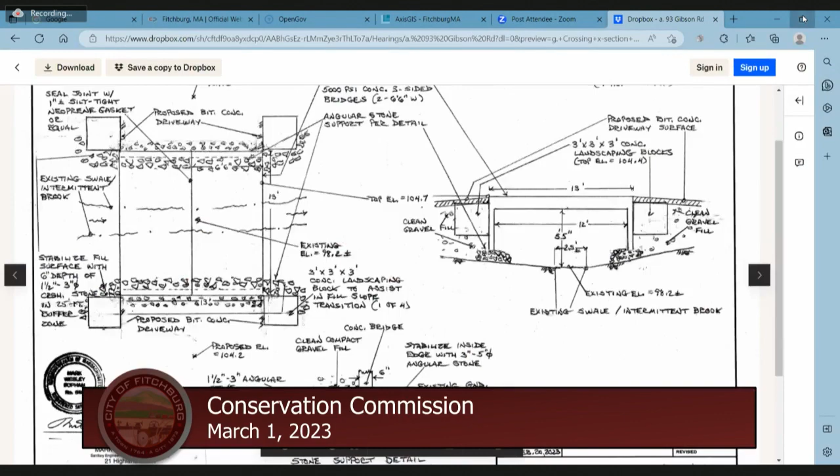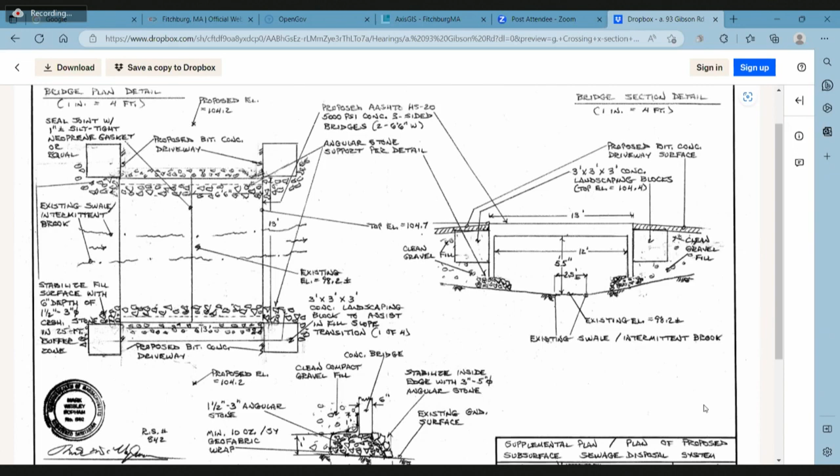Just to quickly recap, this is essentially a 1 inch equals 4 foot presentation of the actual bridge crossing. On the left-hand side is a plan view detail, and on the upper right part of the sheet is a view looking through the bridge crossing with the channel flow in the center. Underneath there's a detail of how you set these things.

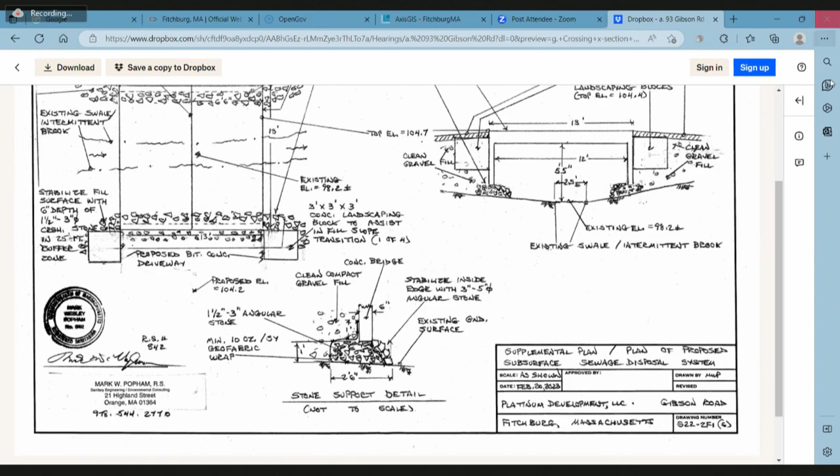You literally don't just place them on the ground surface that exists there, because it's currently a loamy forested soil, so you create a stone support for the bridge itself. An additional feature is on all four corners, back from the edge of the actual bridge, I show basically a 3x3x3 slump block or landscaping block.

It helps with the transition of the fill along those corners, and then you armor the outside of that with the 3 to 5 inch stones. So any runoff that comes off the driveway on the corners of the bridge will essentially be slowed down and filtered through that stone.

Is that all for us, Mr. Popham? Unless you have some questions directly for me.

Okay, let's open the floor for public comment. Would anyone like to speak in favor of or against this hearing, or would like to request more information? Please state your name and address for the record.

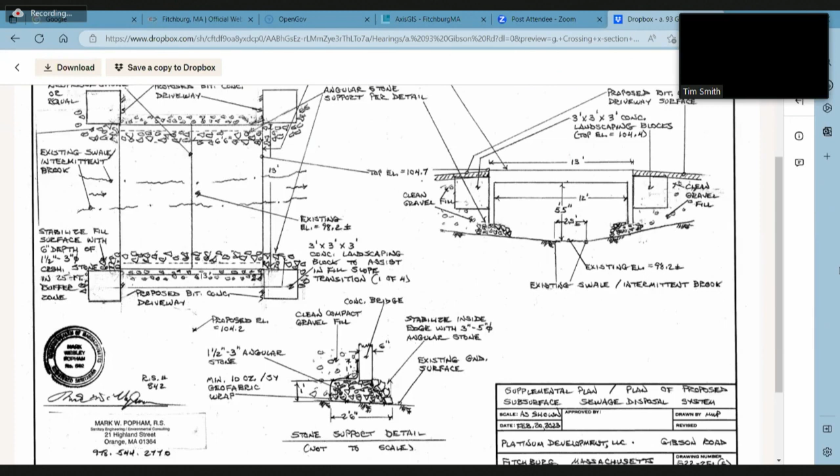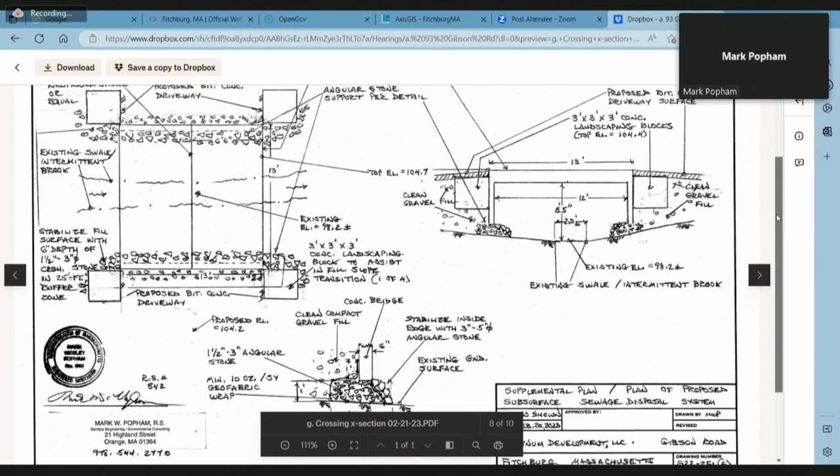How about elevation? Do you have to elevate the land in order to bridge the stream? That's the reason for the proposed grading shown on the site plan, the full site plan view. You do have to, because this has the required height of 5 feet plus over the actual stream section, in order to meet the openness requirements and so forth of the stream crossing standards.

That causes the two ends of it to have some fill brought in, and that's why I referenced in the cross section, bridge section detail, it shows how that's achieved. So there's concrete landscaping blocks used to act as a transition to the natural soil around the ends of the bridge without impacting the brook itself. And then you armor the outside of that with 3 to 5 inch stone, so it doesn't allow for any scour of the fill slope around the ends.

Yeah, so I see it's 5 feet 6 inches over the ground surface, and then the bridge itself, I assume, is 6 inches to a foot thick. So yes, the sides are 6 inches thick because of the loading on the bridge itself. It's a 12-inch concrete thickness on the top.

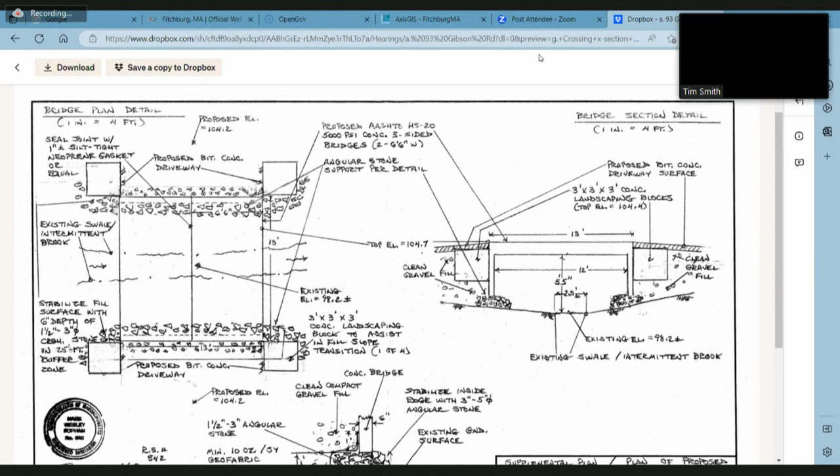You're going to have some type of grade, whether it be 1 to 1 or 1 to 2. Because there's going to be side slopes, right, to the driveway now, because the driveway is elevated, so there'll be side slopes. What's the grade of those side slopes, and how are you stabilizing those side slopes? Those side slopes are 3 to 1.

Okay, and how is it being stabilized? We are just looking for my note here - I've got the stone shown around on the plan view, the bridge plan detail. So there's stone that comes up around either side to the edge of the driveway. So you're rip-rapping the side slopes?

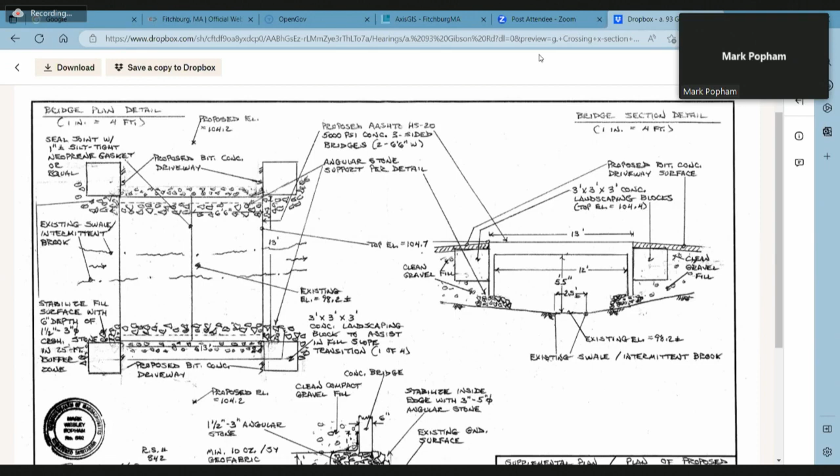Yes. And then as we're getting away from the bridge, we're clearing that area, and he's going to be grinding up some trees. Since it's still wooded along the property line on the other parcel, and we're not disturbing in the 25-foot buffer zone past the silt fence line shown on the plan, I would assume what would most likely make sense in that area, because there is a tree canopy still on either side of this driveway, is to use wood chip or wood mulch.

Right, but so you've got a 13-foot wide driveway, and then there's a side slope on either side at a 3-to-1 slope. So what's the total width of disturbance of the buffer zone? We are 13, and 7, 20 - about 24, 25 feet.

Okay, so obviously this is a significant change, except at the bridge itself where it's 13 feet. This is a significant change over the initial notice of intent you filed, where you had to list the amount of buffer zone disturbance.

Have you refiled the notice of intent, or how did you handle that? Yes, you should have that. I actually changed, can you put up the additional narrative? I modified the narrative accordingly and changed the actual two pages of the notice of intent form to reflect what's currently proposed. Okay, and that's what was submitted, that's what DEP has, and that's what DEP is responding to. Actually, they responded to the original plan, as far as I know.

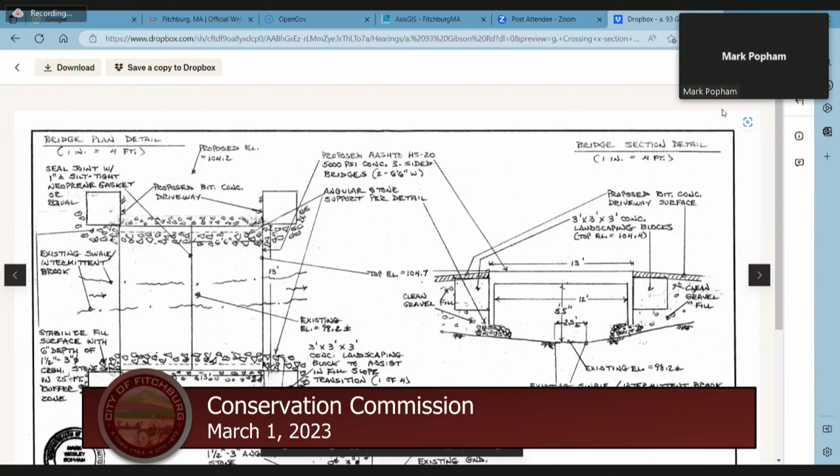Well, to be honest with you, the stream crossing standards and the openness calculations end up with an optimum height on these of 6 feet. So that's why we ended up, again using my past experience on the Holden situation 5-6 years ago, what ended up getting worked out with the Conservation Commission, Holden, and DEP was the closest you can get to that 6 feet, the optimum height for these crossings, independent of the flow of the stream itself.

Okay, and I'm at a disadvantage, I haven't seen the plan. How about the home, how close is it to the stream? The rest of the site layout is exactly as was presented in the last hearing, there have been no changes to any of that layout. That house, right now at its closest point, we're beyond the 25-foot buffer zone by about 30 feet, so 55 feet at its closest point.

Okay, I see it. Okay, thank you, that's all the questions I have right now. All right, thank you, Mr. Smith.

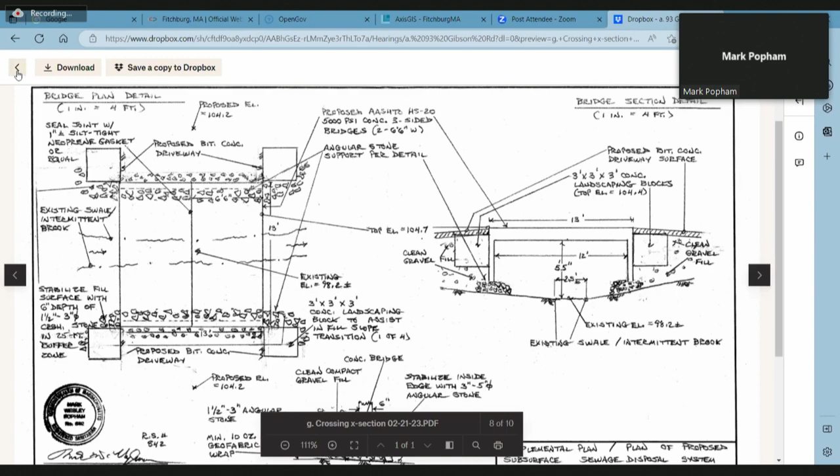There have been additional test pitting done on this site, as I mentioned in the original hearing, about where best to site the home and the leaching area on this site. So we have a pretty good indication of what the soil conditions are here. I didn't mean to indicate there are unstable or unsuitable soils where this bridge is going. In fact, there's probably normal forest litter, a topsoil layer of up to about 8 or 10 inches, and that obviously is not what you would want to set the structure on.

What's being used is more or less a stone spread footing, so to speak, to place that 6-foot-6 wide concrete bridge on top of, without doing major excavation or a concrete footing to construct this bridge. It's not really necessary for a residential driveway. My experience with the two in Holden is that worked very well there—those held in place very well. The additional feature of the slump blocks on all 4 corners also provides extra stability.

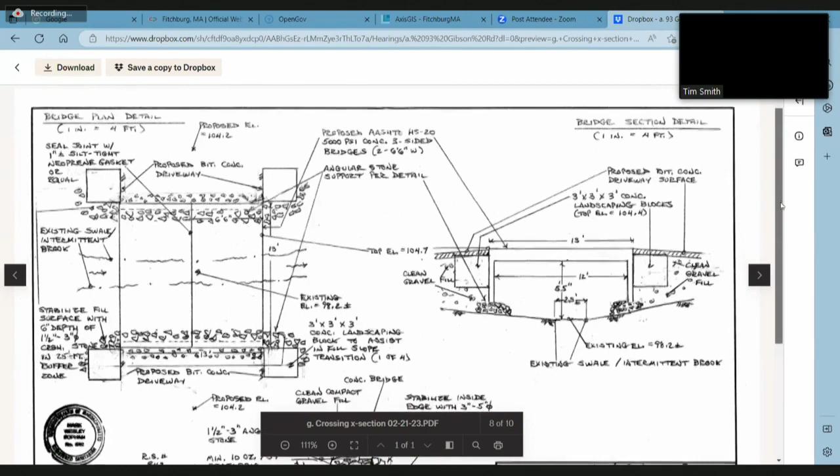So, Mark, no concrete footers? No concrete footers, nope. So do you have to go closer to the stream in order to put that stone down to form the footer? It's about a foot.

And you pretty much can see that on the detail plan.

Actually, another question occurred to me. So in order to construct this bridge, you have to get heavy equipment on the other side of the stream. How do you get heavy equipment on the other side if there's no bridge in place? How does that construction occur? Well, on the Holden situation, we did the approach from the roadway first, as much as possible, got as close as possible, then reached across with a pretty good size excavator—a link belt excavator with quite a long reach—and prepared that other side.

Hi, still going? Go ahead, Mr. Kaufman. Yeah, we can... Okay.

All right, so you're able to reach a lot of this, but you do the approach from the roadway first, and then you reach across with your machine and prepare that other side. Then the units come in, are placed, and you're able to complete the remainder of the work on the upland side.

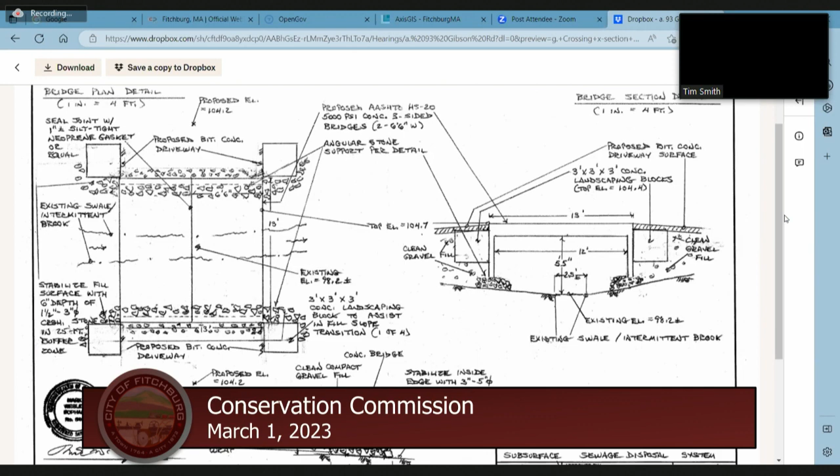So what's the size of that stone? That is 1.5 inch to 3 inches.

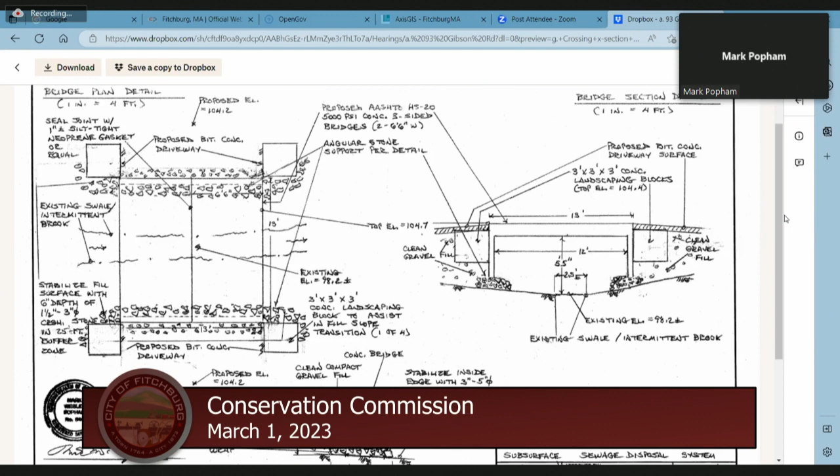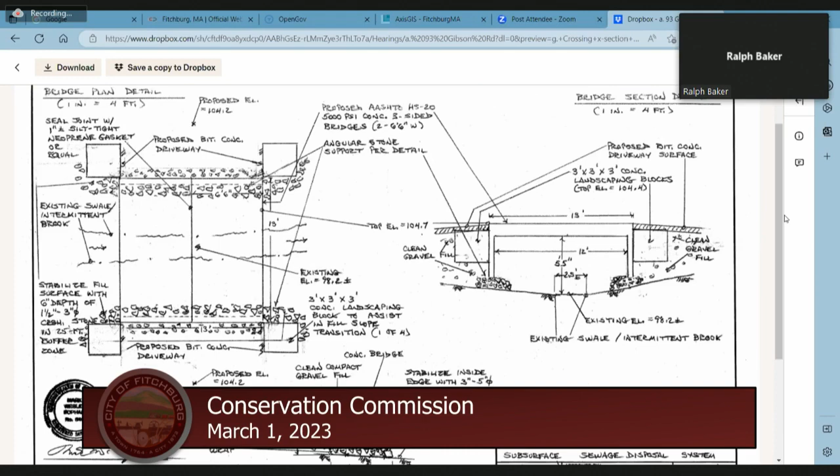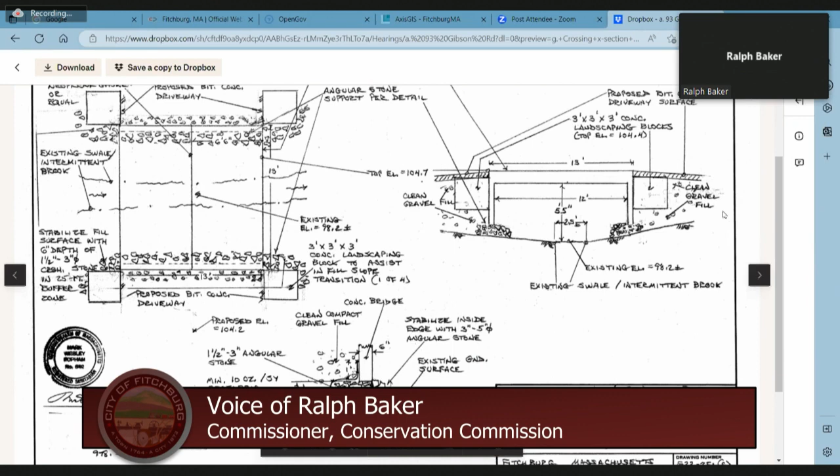Tim, this is Ralph. You might notice in the lower detail, just on the edge of what's being displayed, that the stone is wrapped in a geofabric wrap. That's an important detail because it basically prevents that stabilizing stone from spreading. You knew exactly where I was going with it, Ralph. I was wondering how that was occurring. It also keeps your gravel fill from washing through that stone as well—it kind of encapsulates it as a footing so it doesn't get all kinds of material washing through it and getting in the stream.

What's the lifespan of this bridge? The homeowner at some point is going to have to replace it, and I can't imagine this is going to be inexpensive.

Well, I know they're in place and working well for the last 5 years in the 2 locations I've personally been involved with. It's a concrete structure. I know the company that produces them—this spec here is a company called Oldcastle Precast out of Avon, Connecticut, and they've had pretty good experience with highway-related concrete products. That's what they specialize in, so it's as good as you can get. And obviously it's concrete—like any concrete surface, I don't think I'd get carried away putting salt on it every other day.

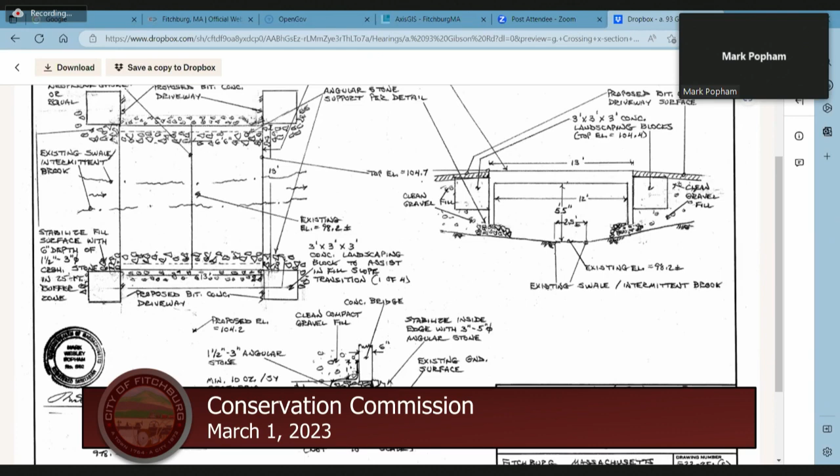Any other questions? Tim, did you discuss a dewatering plan for when this bridge is getting installed? I did bring it up, Tracy, and apparently they're not excavating. They're building the base of the bridge up, so there's very limited excavation, so they don't anticipate having to dewater.

So building the base up, does that mean filling in the resource area? No, what they're proposing is bridging over the resource area. Okay.

I would like to see, I'm a little concerned here because if this bridgeway gets iced over, what's the homeowner going to use? Without those guardrails, if the bridge is a sheet of ice and the car slides off of it into the stream, then we have an even bigger problem.

Anyway, one of my questions about this was that rock wall that's right there. You can see the rock wall has been compromised and water's coming underneath it. Is that a part of your plan? I didn't see anything about how that's going to be handled, if that's a part of this at all. It's just something that I saw that looked like a problem that would only get worse.

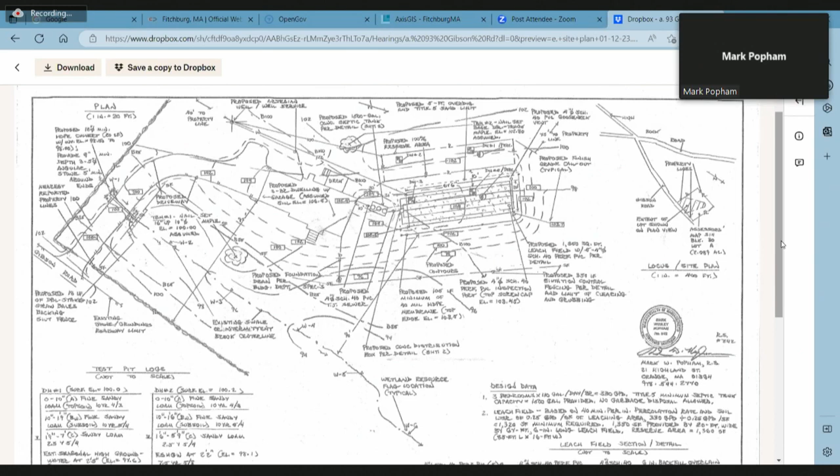It's a line that says SF, and it runs from the stone wall of the road, obviously downstream of the driveway. Then at the curve in the driveway, it's now running pretty much in tandem, in line with the 25-foot buffer zone on that side. Then it moves sharply away from that as you go along the fill involved with the septic system and the house, so as soon as possible we get well beyond the 25-foot buffer with those features.

There's also a note at the crossing of the brook that the silt fence be backed with 24 feet of double-staked straw bales. Everything from the silt fence to the house would be loam and seeded then? Yes. That would serve as your limit of work? Yes.

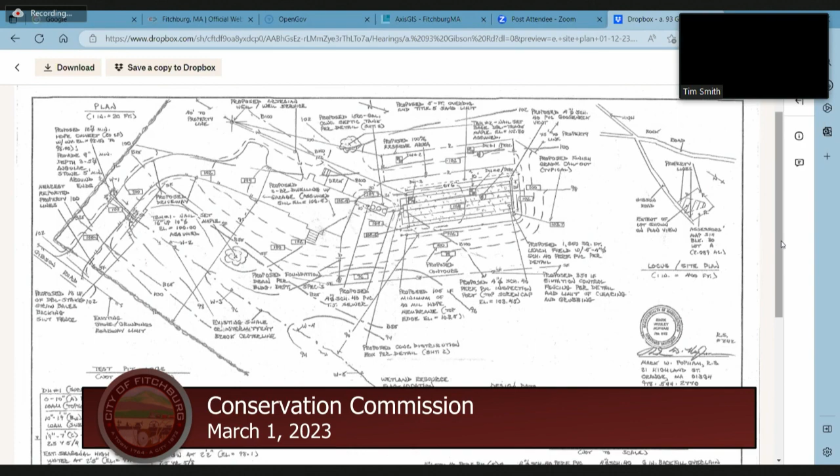Just to circle back to the last couple questions, the bridge builders will be doing their own engineering, and we'll have all that for sure. We need to see those plans stamped with a licensed engineer. Yeah, they'll have that.

Mr. Popham, one quick question on the bridge design. Can you clarify the drawing number so we're always referencing the right thing? I think it's S22, 2FI, and I'm not sure what's in the parentheses there. That's an S — it's my identifier as supplemental. Okay, thank you.

So that's this one, right? Yep.

Is there anything else that anyone would like to ask of Mr. Popham? Nick, were you able to review these plans? No, I didn't get a copy of the plans to review, but I'm happy to do so.

Madam Chair, the commission should not close the hearing until they hear back from DEP, because as stated, DEP has not seen the plan revisions yet. Okay, thank you.

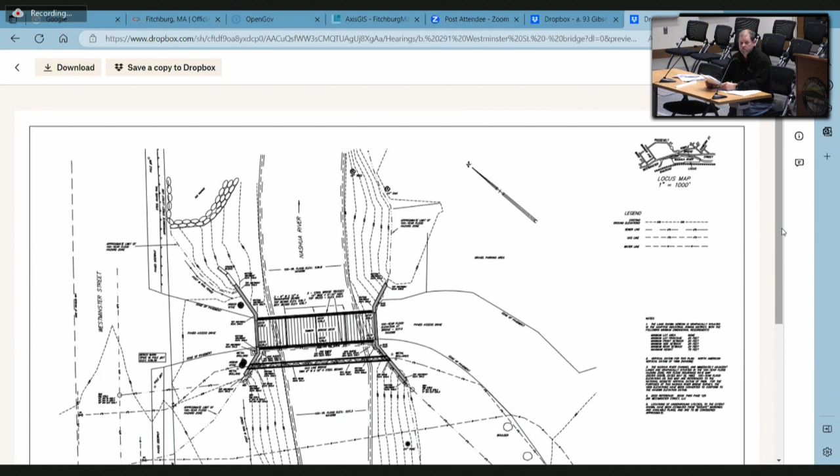Part of the notice of intent, I did email Mike O'Hara, McKenzie Engineering's report, because I wasn't sure exactly what was done, and I don't think the commission was sure either. Peter Reynolds from McKenzie Engineering did a report, a final construction control document, stamped and signed, dated December 1st, 2022.

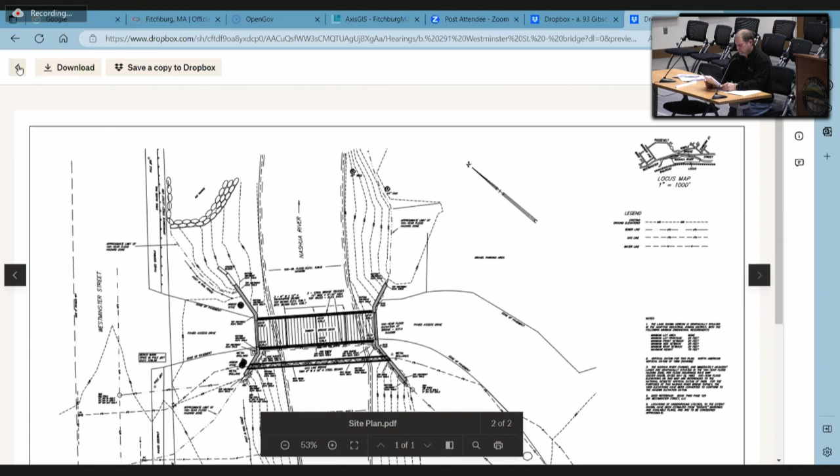He stated that the work done to the bridge was to fix, repair, replace, and add new steel members to it. That was the extent of the structural improvements. Mr. Reynolds rated the bridge at 45 tons, and it is operational and in good condition for traffic.

We did file an as-built plan, an as-built topographic survey of the bridge and surrounding area, showing all the components of the bridge, all the utilities abutting it, the approach, the exit, and all the grades. We showed the Nashua River 100-year floodplain. Nick Erickson was present at the last meeting and requested a copy of the plan and notice of intent, so I emailed Nick the other day so he could take a look at the plan and advise you if necessary.

So I'm here to answer any questions you have with respect to the filing that you requested.

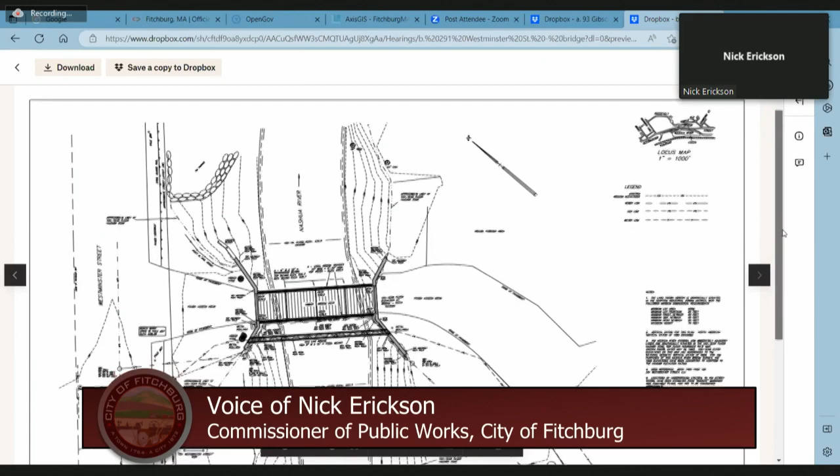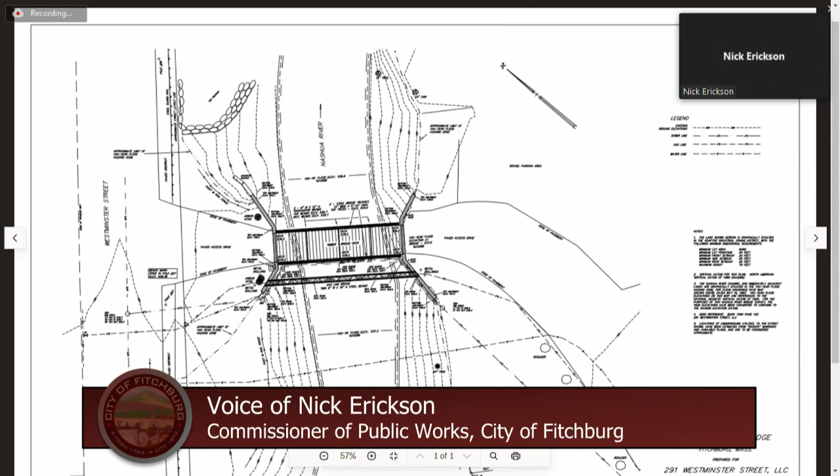Just a second, Mike. This is Nick Erickson. I just had one quick question for Jamie. I looked through the plans the other day when he sent them over, and I was curious, did any of the elevations for the bottom chord of the bridge, the beams, or that insulated sewer line change as a result of any of the work done, or is everything shown on this plan basically the same as it was prior to being worked on to fix the rotted members and whatnot?

My understanding is none of the elevations changed, Nick, but I did listen to your comments when you were here at the last meeting, and you asked me to get the top and bottom elevation of the pipe sleeve. I believe it's a sewer line that goes manhole to manhole, flows towards Westminster Street, and we did get the top and bottom of that sleeve. I think your concern at the time was the 100-year floodplain, and the bottom of that sleeve is definitely a little bit lower than the 100-year floodplain elevation of approximately 537.

The bottom of the sleeve is about 535.5, plus or minus. Top of the pipe is 536.7.

Okay. It looked like the lateral members too were lower than the floodplain elevation, but those go parallel to the direction of flow, so I'm not sure it would cause as much of an impact during a flood event. But I guess the concern would be that sewer line, and I am curious if that was reworked as part of this project, or if that is what it was prior to any of this work being done.

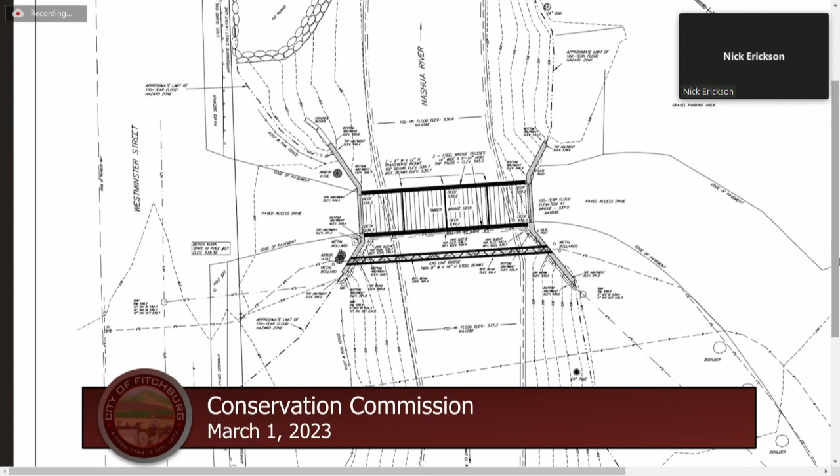It looks like it was refreshed. It stood out to me when I drove past it right after the work was originally completed. So I guess that's a question for the property owners though. My understanding is the sewer line always was present, I believe they sleeved it. I think, right or wrong, good or bad, sleeving that sewer line is the right thing to do anyway. But bottom line is I did forward the commission pictures.

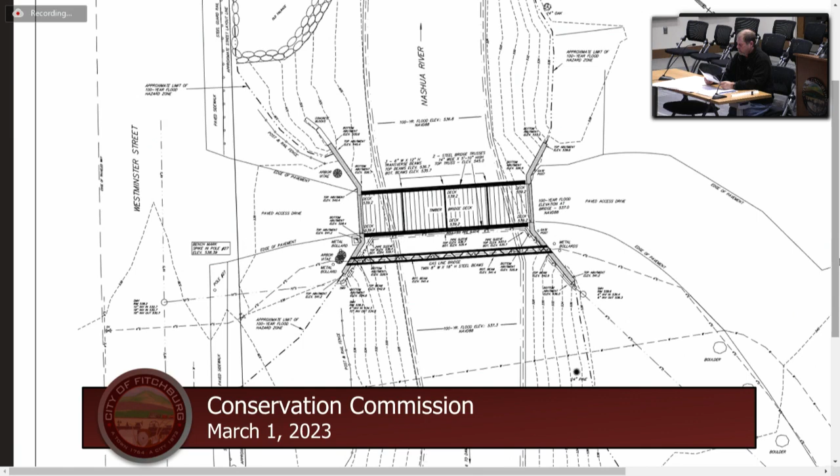I don't know if I forwarded them to you, Nick, but you might have them in the folder if you want to put them up, and we can see what we're talking about. But I do have the pictures here.

See if I can find them first. Can you get to the February meeting? Those pictures were available then, I'm pretty sure. I can get to them on my screen, but I can't display my screen.

So Jamie, we think the sewer line was not sleeved previously, and now they put it in a sleeve. If so, what's the sleeve made of? I understand the concern is, if we had a really significant storm event with a flood surge, maybe some trees fall into the river and get swept downstream. There's a danger the tree could hit the sewer line and break it. So perhaps the sleeve provides some protection to the sewer line. Is that what we're thinking?

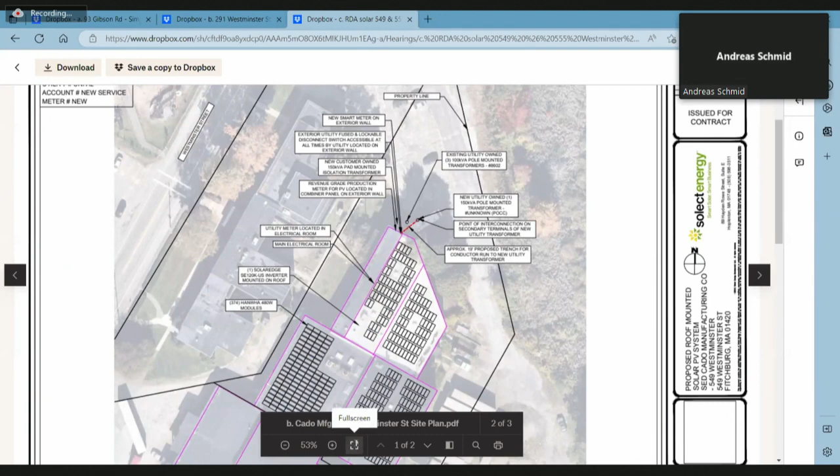Yeah, that's 549. So you see the red trench line there, that would be an electrical conduit trench running to a pole that Unitil will be installing with transformers and a meter on the pole. So that'll be a new pole. There's an existing pole that you see there. So they'd be putting in a new pole for the solar transformers. And in order to interconnect our system, we'll need to run the electrical conduit to that pole.

And that would be the only work that we'd be completing. Unitil will likely have to come before you for the permit to put in the pole. But this would just be pertaining to our work that runs the electrical conduit from the building to that Unitil-owned pole that they'll install.

So in this case, it's 12 feet. I believe it's 50 feet for 555 Westminster.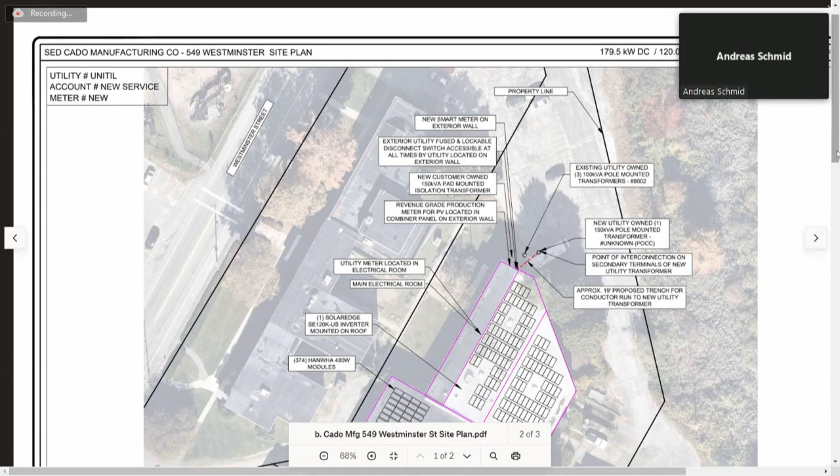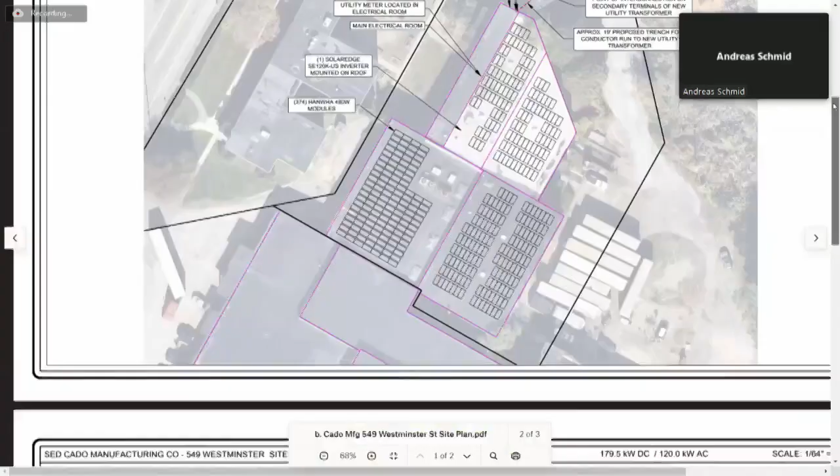So, Mr. Schmid, 549, what are you doing at 549? 549 and 555 Westminster would both be having solar installed on the roofs.

No, I mean the trench that you're talking about. You said two short trenches? You see that trench there, it's the red dotted line right there, exactly. So we just need essentially permission from you to dig that trench, to put in the electrical conduit between the building and the utility pole.

And we're seeking that permission because it is within 200 feet of the river. Steve Gregory, as I mentioned, who was supposed to be here, he did confirm in a phone call that we do need to have this meeting with you to do this work.

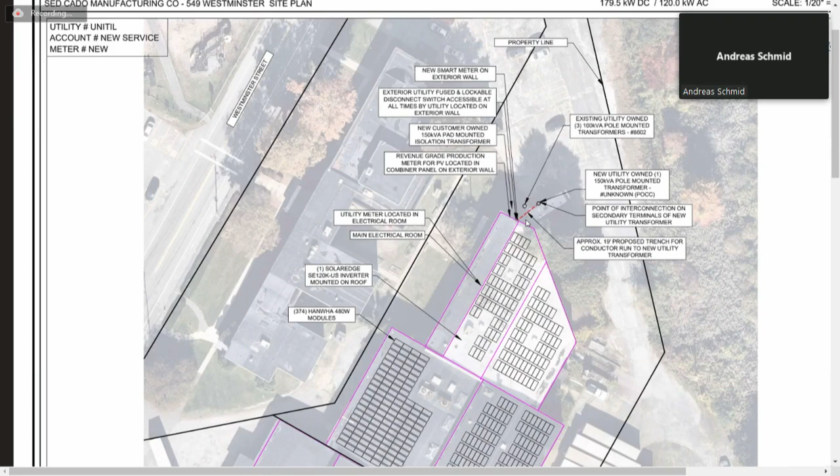That's correct. What you're asking for, though, is do you need an NOI, a notice of intent, or is it okay to not submit a notice of intent? I think that is the question.

Essentially within 200 feet of the river, we would intend to, with that work, make sure that we're not allowing any kind of runoff to carry sediment into the river. So we would have to put in some sort of controls for that. I imagine that we need—this isn't my area of expertise, frankly—but I imagine we need to put in some sort of silt fencing, correct?

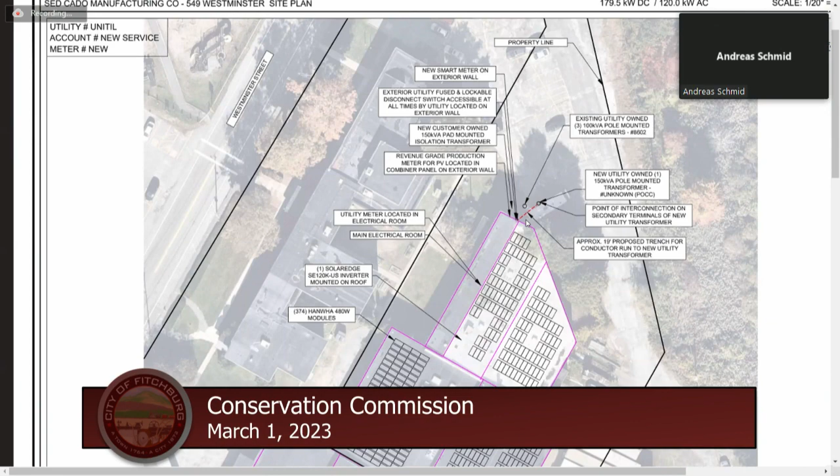Mr. Schmid, what's your timeline on this? We likely won't be starting construction until late summer at the earliest. So we have time, we can have this next month when your associate is able to come and talk with us about this.

Yes, that's true, he does live in Chicago. So I don't know, it makes me worry a little bit that he's not there. I wonder what held him up, potentially flight delays or something like that. But he is back and forth between Chicago, and as many people do these days, he works remotely. I live in the Berkshires myself, so if I had known that he wouldn't have been there, I would have been there in person myself and better prepared. So I apologize, but yes, we do have time.

The utility is waiting for us to submit final interconnection service agreement payments. We've already submitted 25% deposits to the tune of $60,000. We need to submit another $80,000 to them now, but we have requested extensions for these two properties for reasons of approvals that we need to get from you. We have the checks written, we're ready to submit them, but ultimately this would hold up submittal of those checks. It's not really a big deal, but...

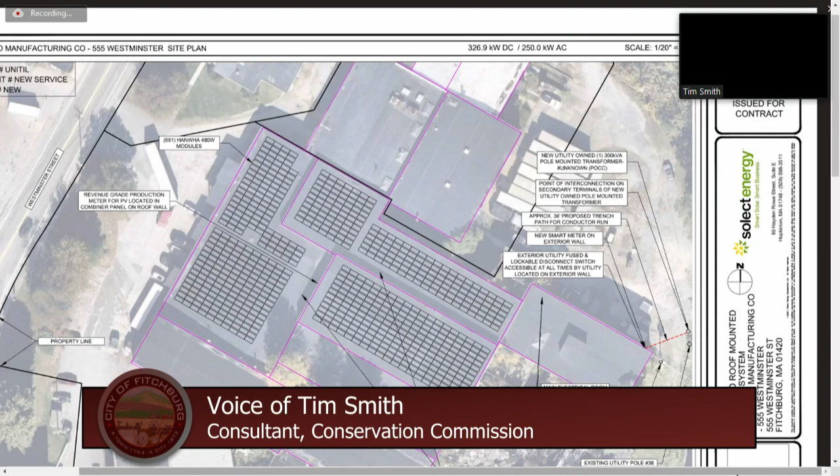Madam Chair, this—Yes, Tim Mr. Smith speaking, can I ask a question of the applicant? Please. Yeah, do you know if—so I think I'm familiar with the site—are you trenching in asphalt? So you make your saw cuts, you dig up the asphalt, then you bring your excavator in or your backhoe, you dig the trench, you put in your PVC conduit sleeve, and then you backfill with either flowable fill or you use the spoils from the excavation. And then you pave over it, so it's really a temporary impact. Did I just describe the construction, or is it something different than that?

Yes, that is correct, except that there is no pavement in the area that we're digging. So, okay, so we would just soil—refill the trenches with the spoils from the excavation. So no change in grade? No change in grade, no cutting or patching of pavement necessary.

It's just digging the trench, putting in the conduit, and refilling the trench with the spoils and compacting it. And then we'd be done. Pull out the silt fence and we'd be done. But it's a gravel area, right? It is, yeah, correct. It's a gravel area there in the back of the building, between the building and the river.

So I would recommend to the commission that they advise the applicant to file a request for determination of applicability. It's up to the commission to determine if they want to issue a negative determination, meaning they don't think there will be an impact to the resource area, so you wouldn't have to file a notice of intent. On the other hand, the commission could issue a positive determination, meaning they find there could be an impact to the resource area, and therefore want you to file a notice of intent so they could get more detailed information.

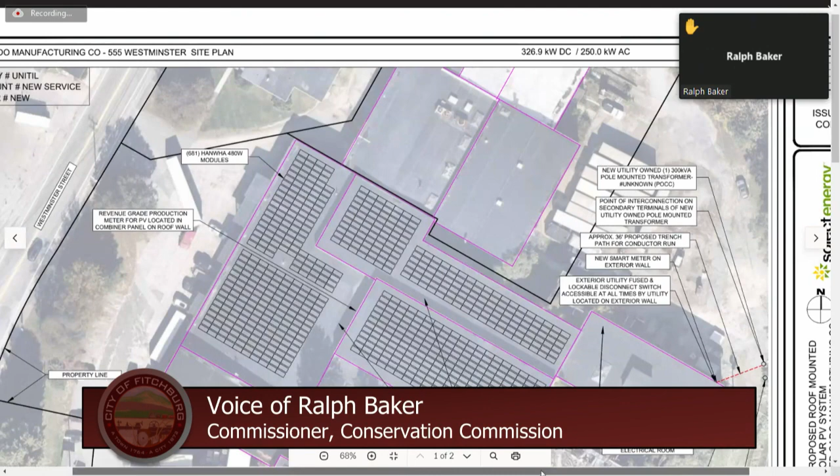Dr. Baker: I don't have much concern about 549, but 555 is very close to where the remediation was carried out that we observed for a couple of years. There were PCB contaminated soils in that area, in both the bank and in the sediments under the river. So I am concerned that the applicant needs to demonstrate that the location of this 36-foot-long proposed trench is going to be in a clean zone.

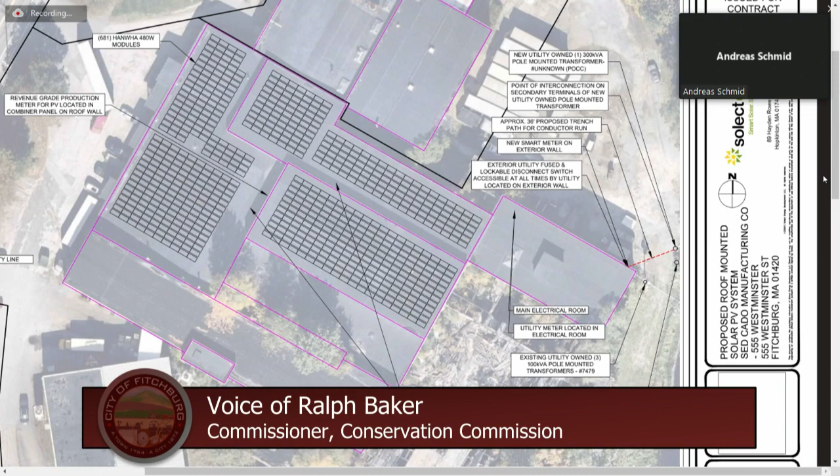Yeah, that has been demonstrated by the engineering firm that handled the remediation. We consulted with them extensively, and they looked into it, and they confirmed that this is not in that remediation area and not close enough to it to be of any concern.

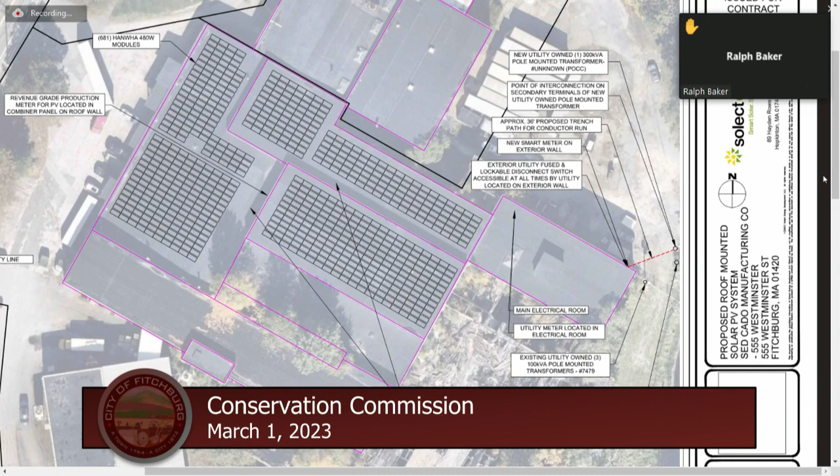All right, then I would suggest that information needs to be submitted along with the supporting information for this request for determination of applicability, please. Okay, we can do that. Has that been submitted? We don't have that information. Yeah, we're going to need that.

So should we continue until next month for them to provide additional information? Yeah, I think we need the other gentleman here. It will give you a chance, Mr. Schmidt, to submit the paperwork that Dr. Baker wanted to see.

Or do we move right to notice of intent so that we can condition it? No, Joyce, I don't think that's necessary. If they satisfy us that we could issue a negative determination, I'm not one to add excessive burdens if it's not necessary.

Right, but as Ralph said, they just need to submit supporting documentation that it's not contaminated. So to our application that was already submitted, we can add a map of the remediation that shows that these two areas, 549 and 555 in particular, are not close to that remediation area, or maybe a letter from the engineering firm? Yeah, I would say either of those might be sufficient, just as long as they're clear. Okay, understood.